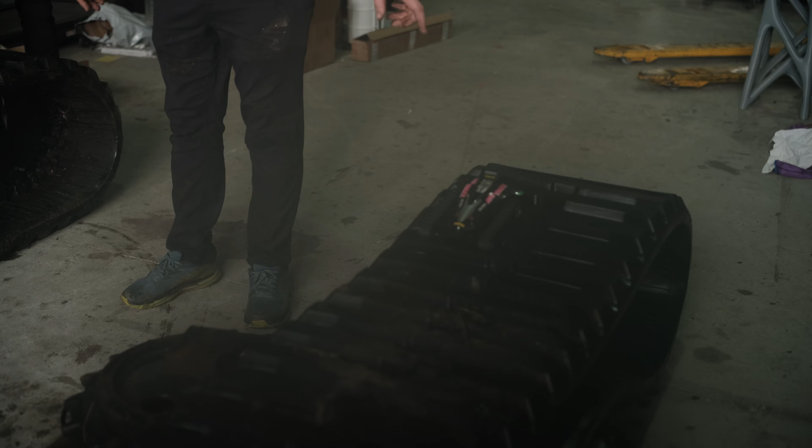It's nearly square, like it's wide, but that'll help with the skid steering. It's not moving - oh shit, it's heavy. But if we build it to that scale, that length, if we go that wide, we can't transport it. We can't put it on a trailer.

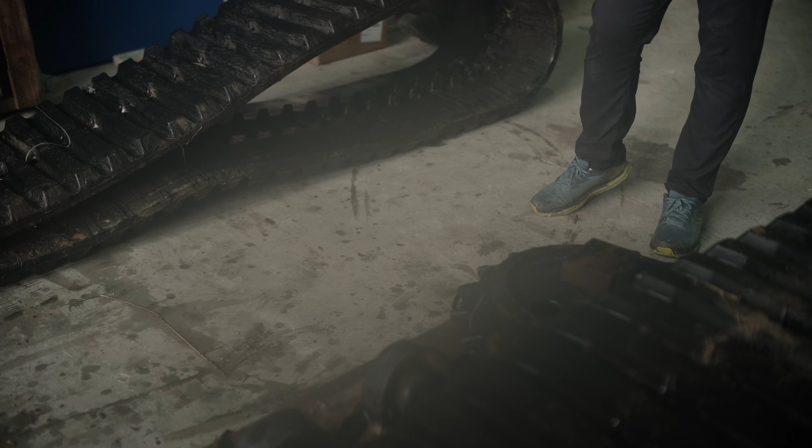I think we have to go all the way over to here. We'll take a little bit of liberty and just bring it down, just so it's within legal length. We could go on a trailer like that, right? No, we just don't want to exceed like 2.5 meters, or we'd need road closures to transport it - that's our limit. We just want to bring it down so we can...

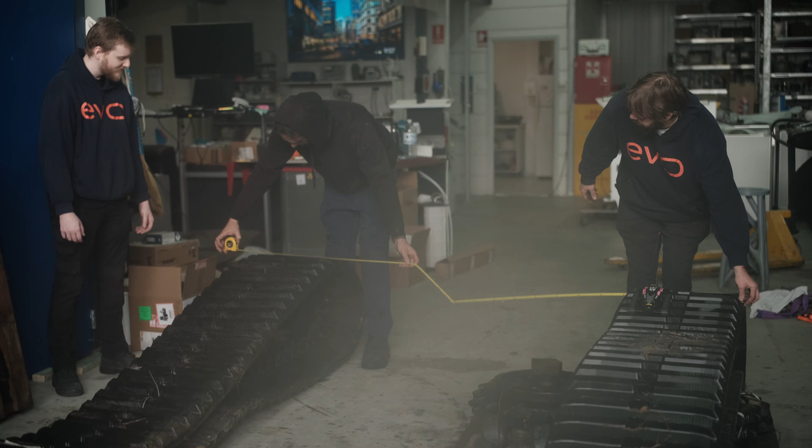That's 2.4 there - you've got to make the tape measure tall. What is it now? I was getting the tape measure wrong - let me check. 2.4, yeah, okay, so that's right.

So I want to look at this - one for bum cheek, I've got... wait, I've got Josh's seat.

I got blue tops. So they look like rubber tracks, but they're very heavy because every one of these is a steel bar. If you look inside, there's teeth sticking off the steel bar, and then there's steel cables connecting all the steel bars together - the tension members - and then it's all cast in rubber.

Right, but the weight is from the fact that it's a lot of steel - every one of those is probably 1 kilo per rung, so it adds up. 300 or 400?

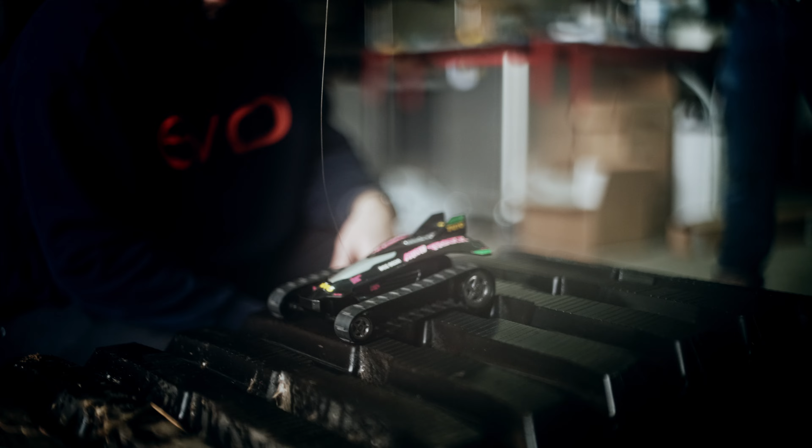And engine type? We'll need a big engine, a big torquey engine - so a big V8 or a V10.

A V10 would be accurate to the model - it's got 10 little runners on the top of the little chrome plastic piece there. So it'd be ideal if we could get a big V10.

Where would that go, sit? Accurate - where would it sit? So I'm thinking if we sit the engine here, just like the model, engine here, we've got no room for the transmission behind it, so we run the engine backwards - just like on a Countach where the engine and transmission go down between the seats - and then we use a transfer case that would normally be running the drive back to the front axle.

It's going to run back and use that front diff as the rear diff, and we'll have to lock the center diff. Because we're going to delete - there's no point driving the front of the tracks, you only need to drive the back - so we delete the front tail shaft, which was originally the rear tail shaft. So we lock the front diff, the center diff, remove the front diff, and it's just a 2-wheel drive.

2-wheel drive? Yeah, but we're just using an off-the-shelf 4-wheel drive gearbox and engine, so hopefully. And where would you sit?

We sit either side of the transmission. Two? Yeah, I reckon - well, he wants it to be a 2-seater. 2 would be more fun, right? You've got to experience this with somebody. 2 will be fun, but it's going to be hard with the bodywork to fit 2 people in.

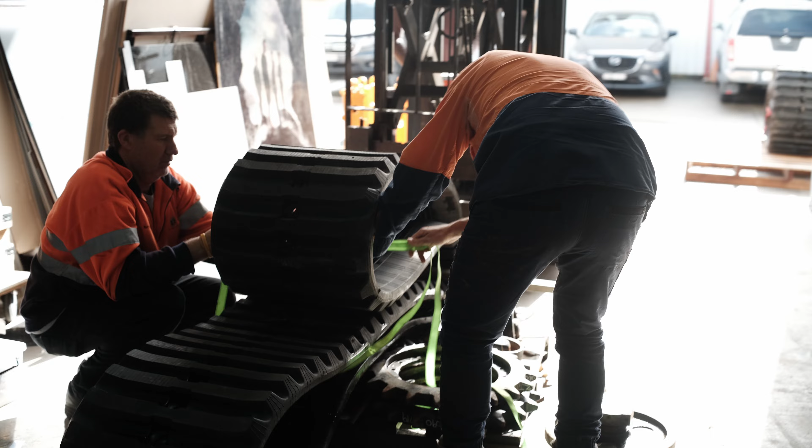Yeah, alright. You go down.

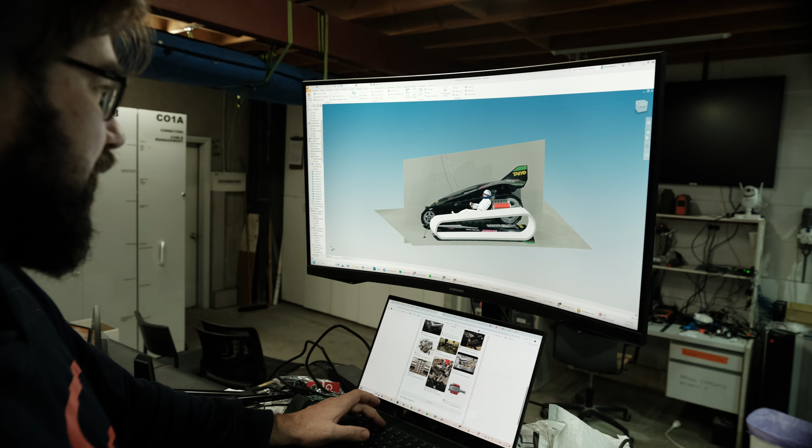So what we're doing here is very quickly testing the feasibility of fitting everything into it. We found some tracks, and that's setting our scale. I've got this generic model of a driver and a generic model of a V10 - that one happens to be a Ford, apparently - and the tracks. We're going to see if it all fits by overlaying the pictures of the toy car.

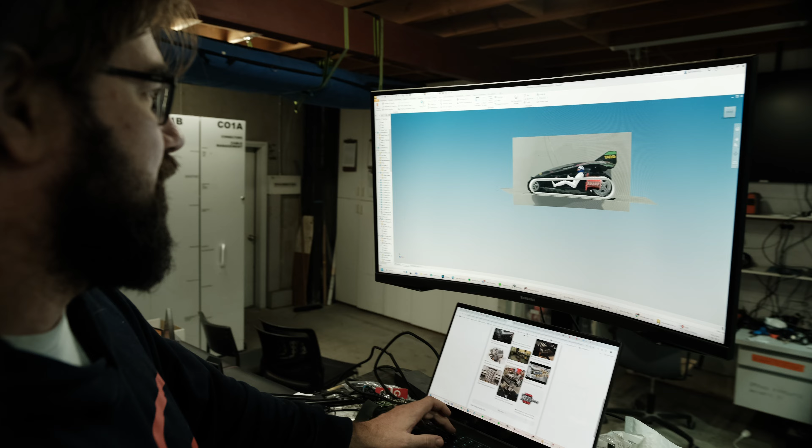What are the main concerns with scale? We're just trying to see if we can package and use off-the-shelf parts. So we're trying to use this donor vehicle, use its engine, its gearbox, which we haven't modeled yet, and just trying to see if it all fits in and there'll be room for somebody to climb in afterwards and drive it around.

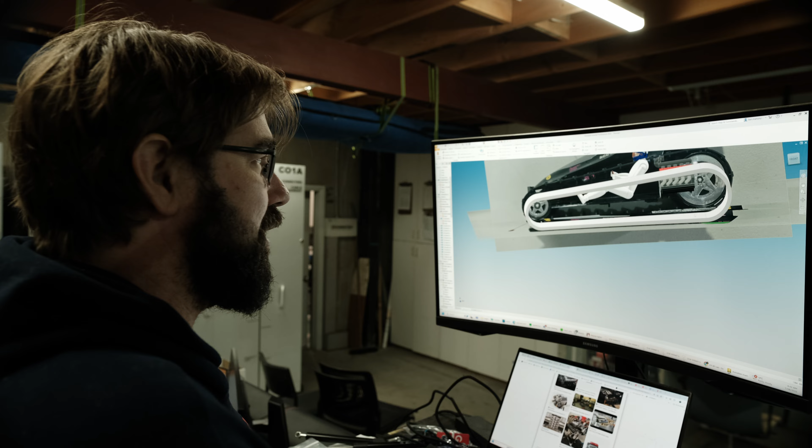So I'm just playing with what size wheel we put at the front and the back, so it's staggered like the original RC car, and just working out what wheelbase we'll achieve with that, and then if a person will fit inside after doing all that scaling.

We're also playing around with limiting it to 2.5 meters in width, because that way we can legally transport it when we finish building it and take it out to a farm and rip it around.

That engine is quite close to the driver, no? That's awesome. You will definitely feel the power. You'll hear that. Yep. Yeah.

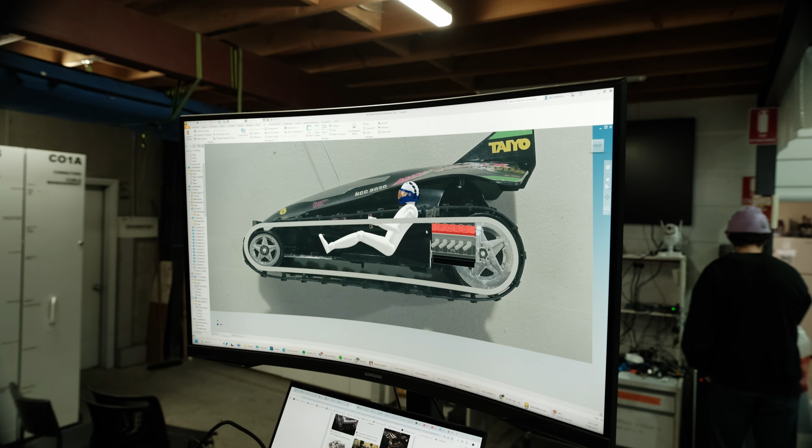The engine we're using is twin turbo, and the turbos sit right here just behind where we'll put a firewall. We're just playing at the moment with if we can fit two people side by side.

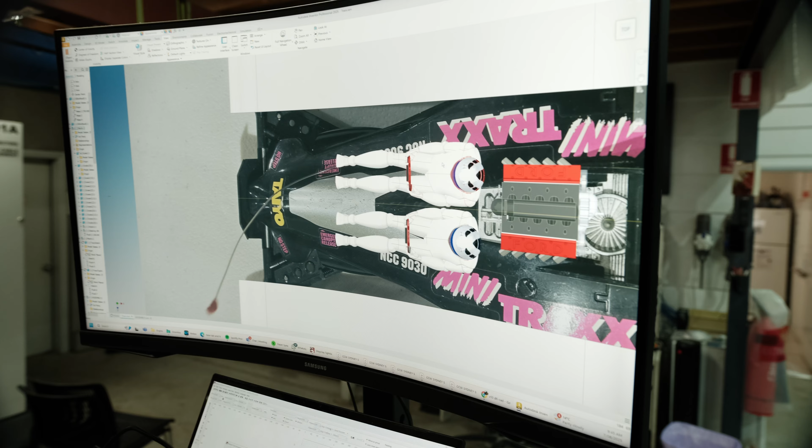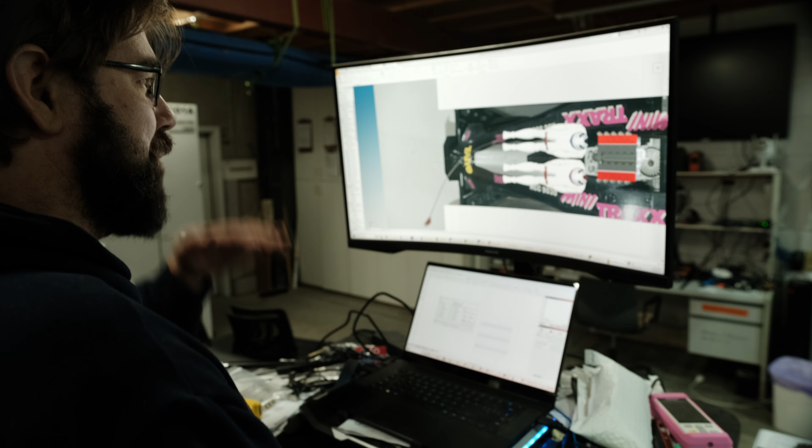I think we're going to take a little bit of liberty with the width of the cabin, but I think it will fit. That will let us run a tail shaft down in between. If we have one person in the middle, it's going to be a bit challenging with the tail shaft - we'll have to either sit the pilot above the tail shaft or dogleg the tail shaft around, which is going to be a lot more challenging.

But pretty happy with what we've achieved here, because the front wheels fit inside, the rears fit, and it's all fitting. Nice. What do we got here?

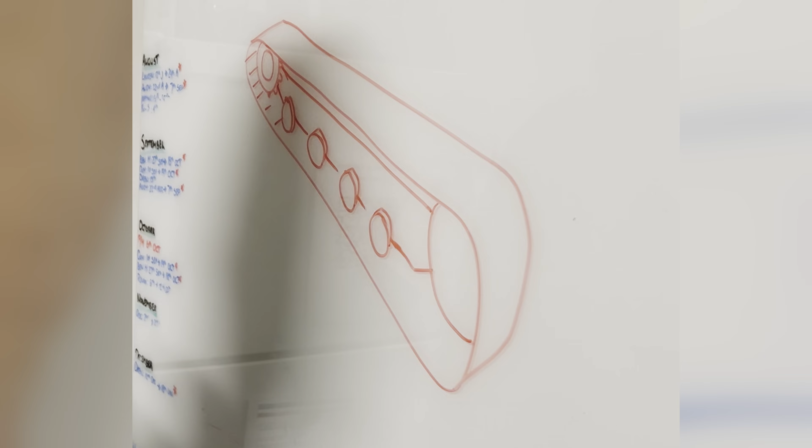Just working out a way that we can add some suspension so that we don't rattle the teeth out of the test pilot or fatigue the steel frame or anything. I think we just suspend the cab, which means we're suspending the engine as well and all the running gear, but we keep this part very rigid, right?

Oh, okay. So it is suspension, and you've got a track - this is like looking at it from behind, and we've got the cab here with the V10 engine inside. And with that, we've got CV joints and axles already, right? So we can independently articulate these tracks from the cabin. Yep, from a drive point of view.

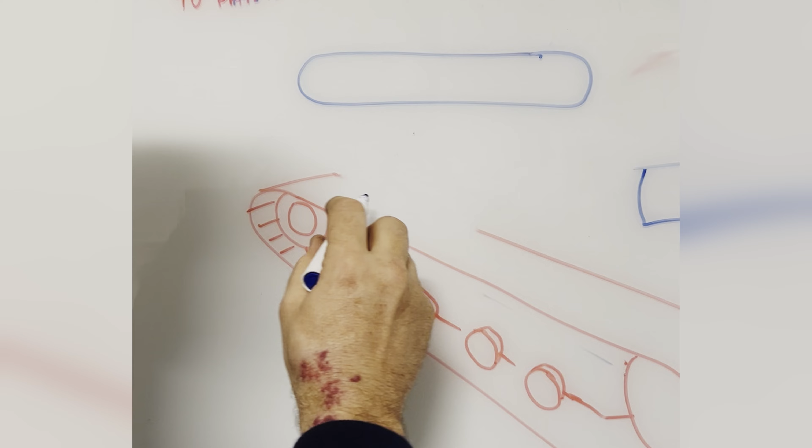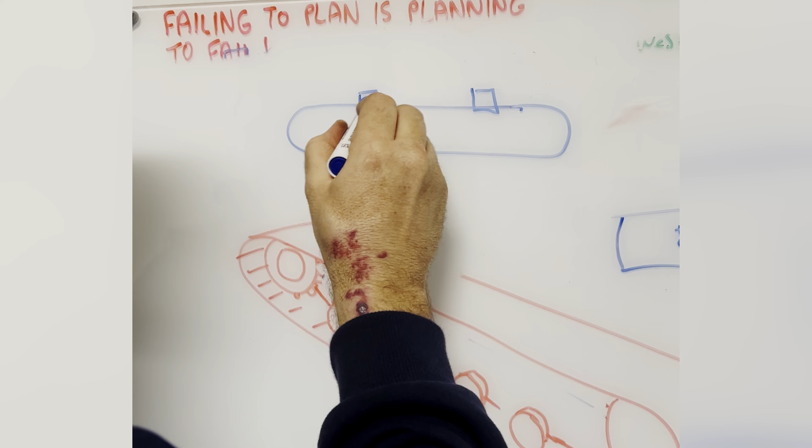It's just how do we rigidly connect this? I was just researching, and I saw pictures of how they do it on a Bobcat skid steer - they just have a bar across underneath the chassis, front and back, with a tube inside it that has a link down, and then they attach that point to the track frame.

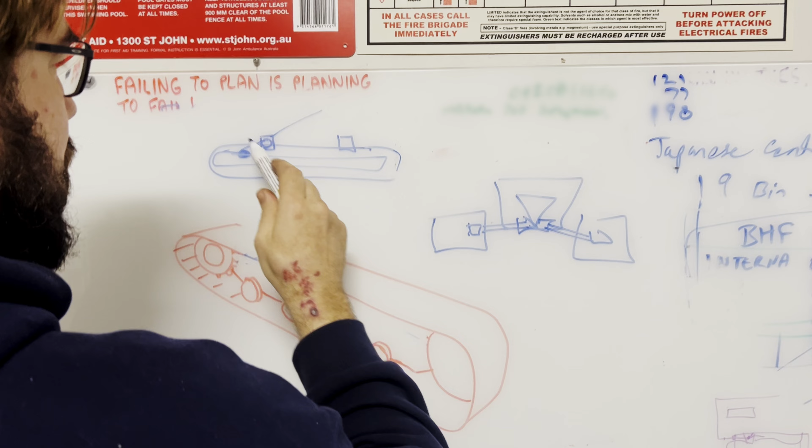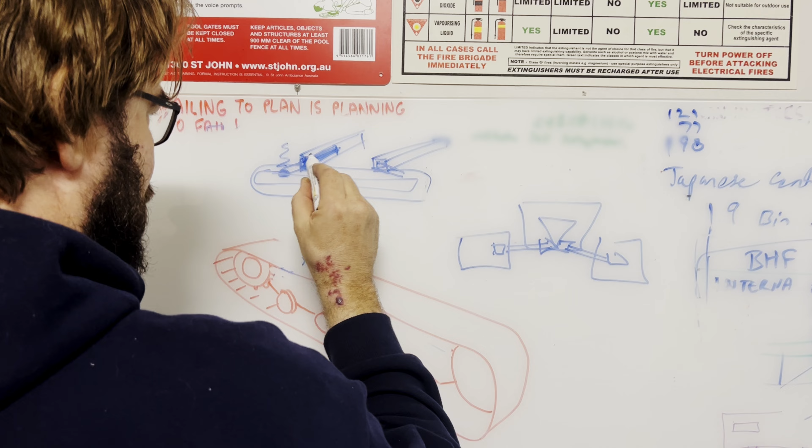Right? And then we just run a torsion bar front and back underneath the cab with a link down to here. And we either use this just as a pivot point and have a separate spring, or we can have a torsion rod where we mount that point rigidly and we twist the rod, or we have a solid rod and put rubber around it and it twists inside that rubber.

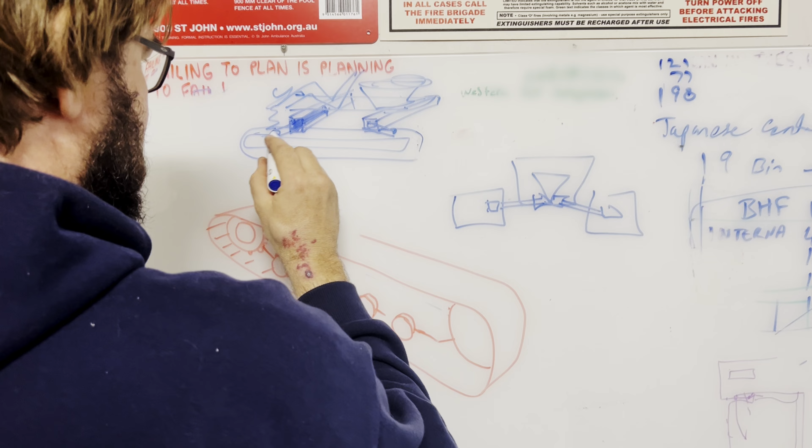So does that mounting mean the cab is sitting up on top of... Yeah, so our frame sits up on here with our engine up here and our driver sitting here, right? This link here can't be quite as rigid as the front one - we need like an extra shackle, just because this length between these two changes as it goes up and down. But we just mount one of them rigidly and one with an extra shackle. Okay, nice, so it gives us a little bit of suspension.

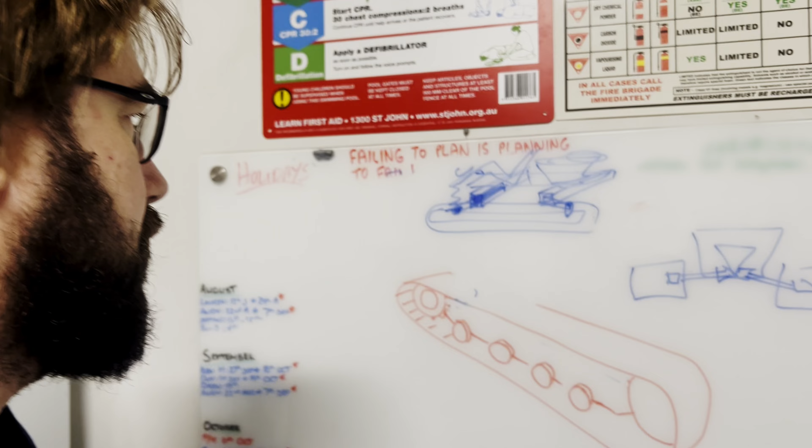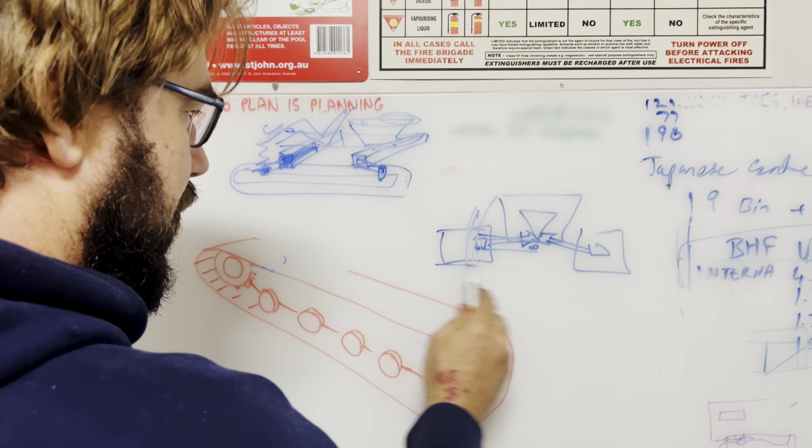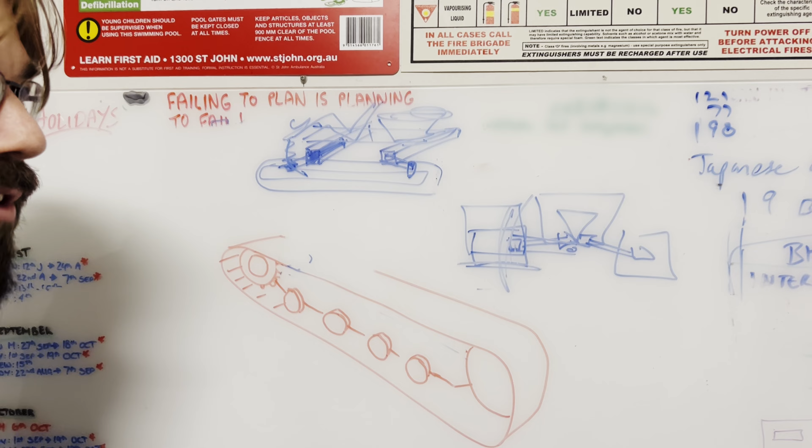A little bit of suspension, and it holds all this. Like on a car, you have a swing arm suspension and your camber changes and things like that, whereas we want this track to stay square, even when it rides up and over something. So this method just means it moves slightly backwards and forwards through the arc of the suspension travel, but that's not an issue.